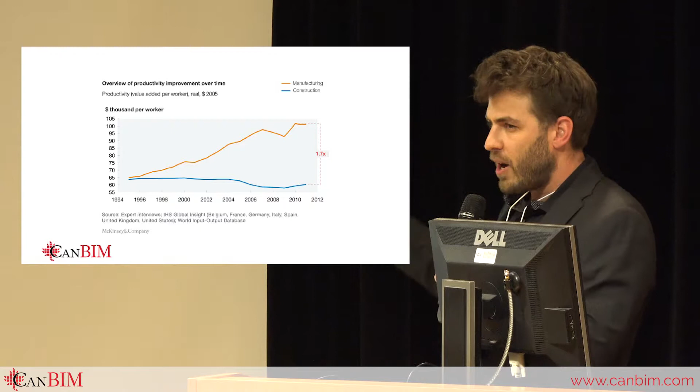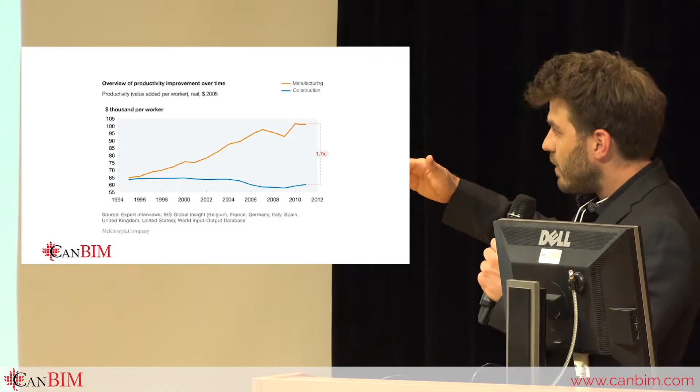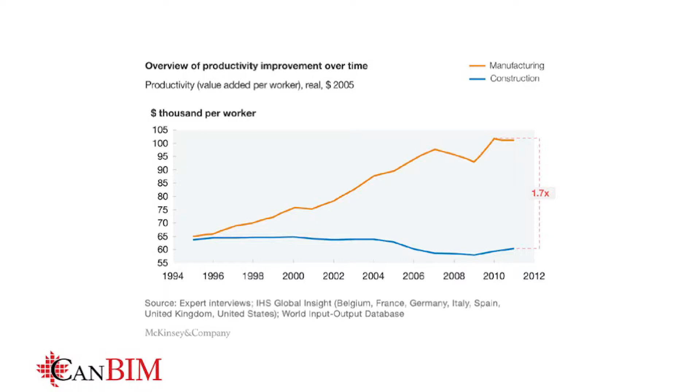So basically, the construction industry is one of the farthest behind of all industry sectors. I like to start off with this graph to illustrate how far behind the construction industry is compared to the manufacturing sector in terms of efficiency in labor and man hours. The blue line illustrates the efficiency of man hours per person in the construction sector, and the orange line represents the manufacturing sector. And we're actually in a downtrend, because as projects get more complicated, the tools we're using are not keeping up with the complexity, and we're losing efficiency on how we execute this work.

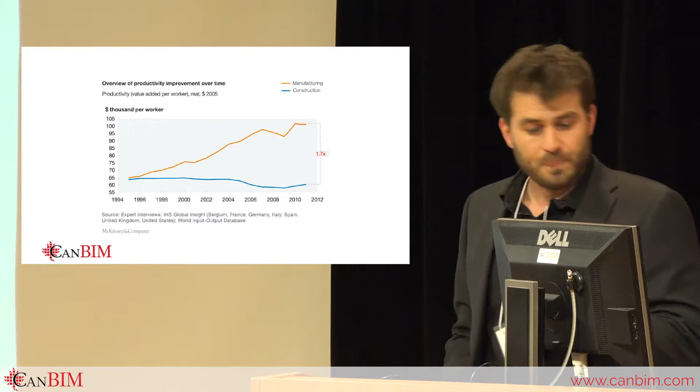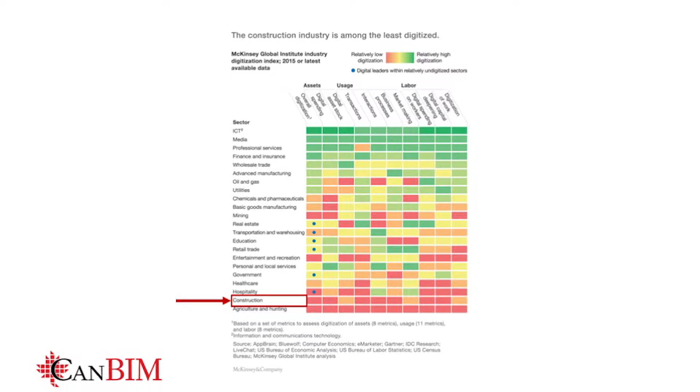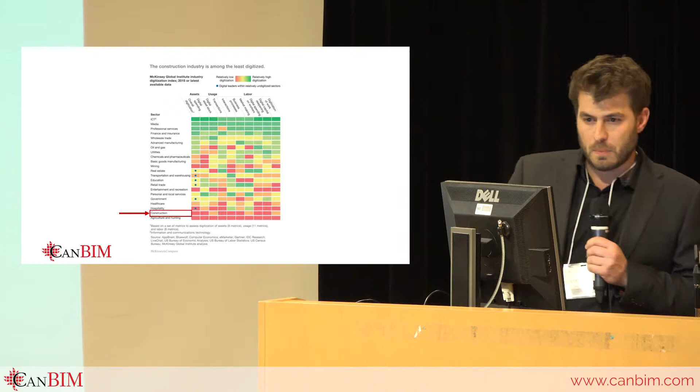Another illustration shows this. It's a little hard to read the terms on the left there, but those are different industry sectors, and this is a survey about the adoption of digital technologies per sector. At the top is the ICT sector, second is media, finance and insurance just below that, and the second last row is the construction industry. So we're just above the agriculture and hunting sector in terms of digitization within the industry. So you can really see that we're falling behind compared to all these other sectors.

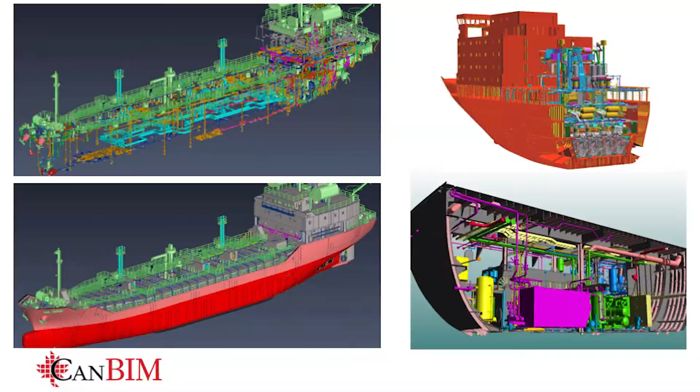I like to use the example of the shipbuilding industry, especially being here in Halifax. I'm sure a lot of people can relate to this. They've adopted these digital tools and 3D workflows because it makes sense for this industry, because they're working with a very finite amount of space, and the risk is a lot higher, and they can increase their efficiencies, start prefabricating their components, and manufacture these ships in a very efficient way.

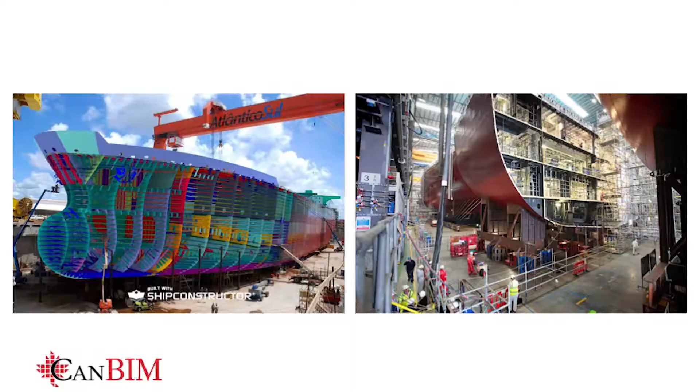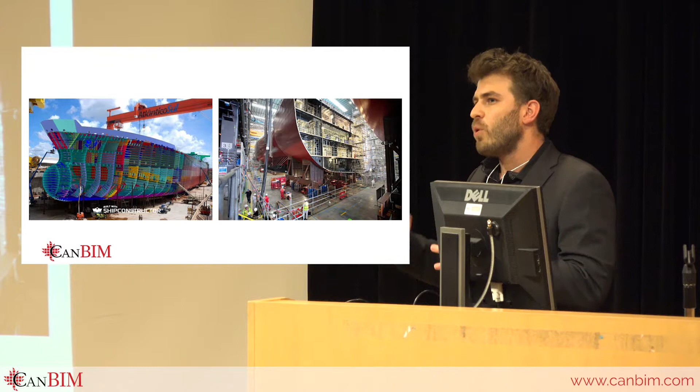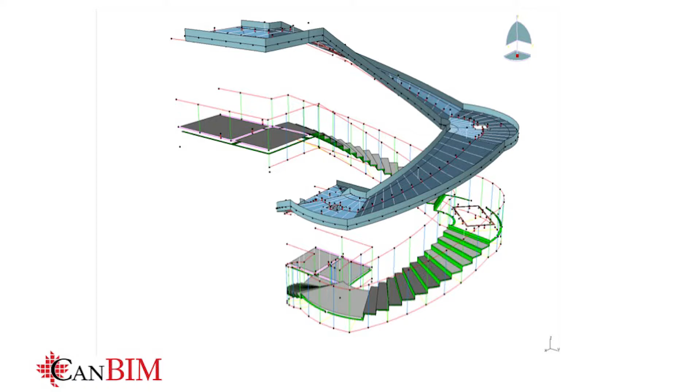So basically, what we're trying to do is take all these examples and workflows from these different sectors and apply them to the construction industry to think more of a manufacturing approach. This is an example of how we're digitizing components of the buildings, where we can break them down into smaller chunks and design them. We can fabricate them in digital tools, and then we can construct these components in the exact same way that you would manufacture them in the shipbuilding sector.

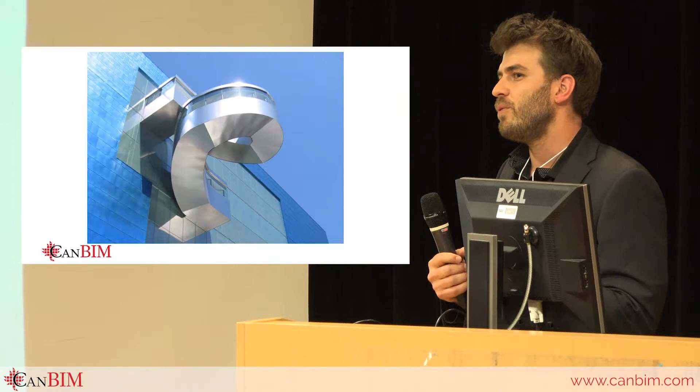A good way to think about BIM is that it's basically an evolution of tools that we've been using in the past. Traditionally, there was hand drafting, AutoCAD came along as a more efficient computer-based version of hand drafting, and now building information modeling is essentially a more advanced version of the CAD-based systems.

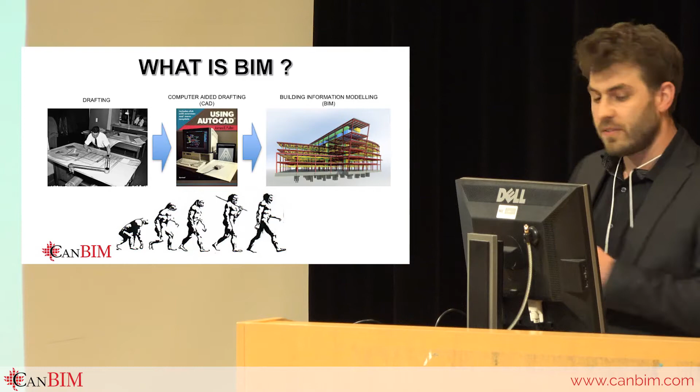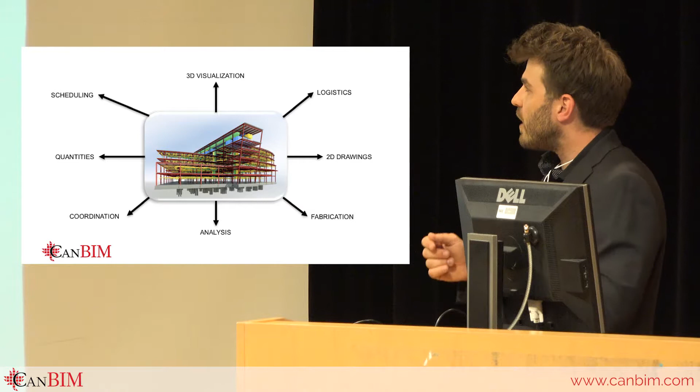And when they started developing these 3D models during the drafting process, we started to realize that there are all these other benefits to having these models. We can use them for fabrication, further detailed analysis, coordination. We can pull quantities from them. We can use them to schedule, for 3D visualizations, and for logistics and planning. So it exploded with all these other use cases for these models.

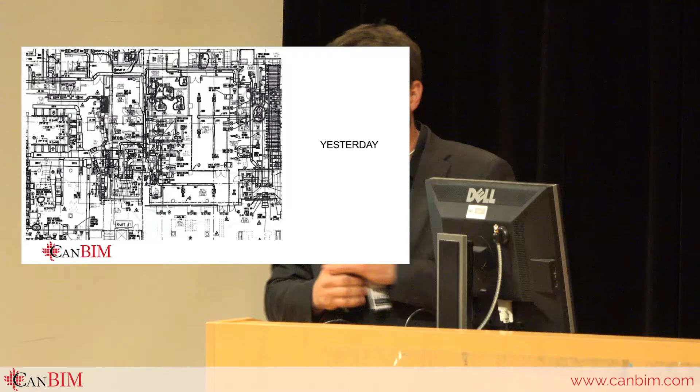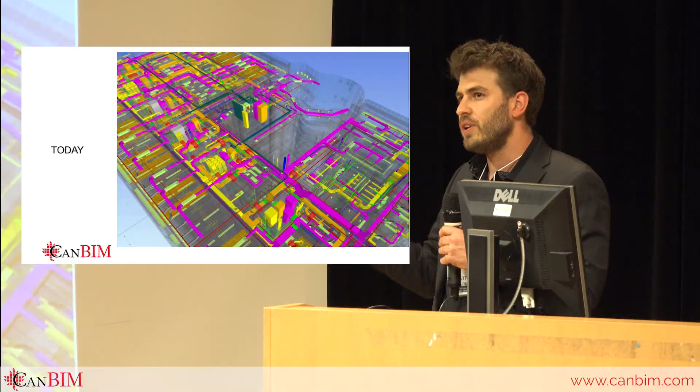This is an image of what a traditional hand-drawn drawing for HVAC systems in a ceiling space looked like yesterday. And this is the type of thing that we're using today. It's the same amount of information, but we're using more advanced tools to display that information and manage it.

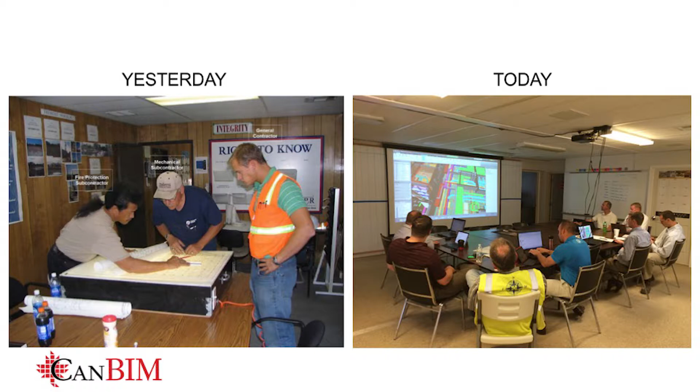Another good image. I like to use this one because I'm sure some people can relate to yesterday's image of using light boxes to do interference checks between multiple subtrades on the job site. Essentially, they would shine the light, overlay the drawings, and you could see if the two systems were interfering with each other. We're doing the exact same thing today in the image on the right, except we're using the 3D models. So we're not reinventing the wheel, we're just adapting to the changing times.

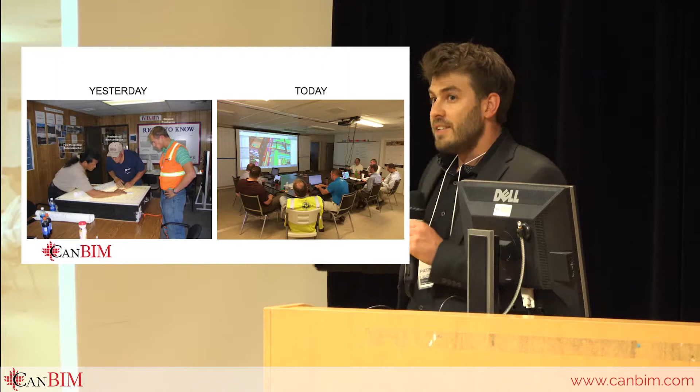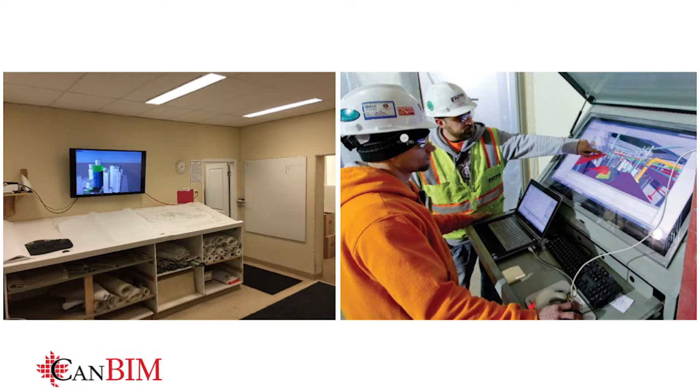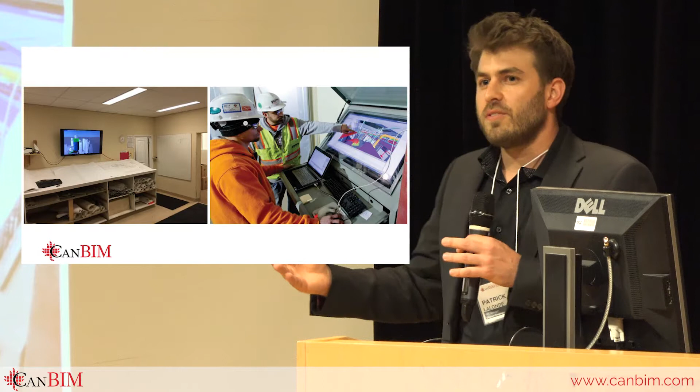Another image shows something that you would see on a typical EllisDon job site. We still maintain the paper-based drawing systems, but we also have access to the 3D model, which we can use in conjunction with the paper and two-dimensional drawings to help us understand the job and communicate things in the field. It's another example of how we've integrated these digital technologies into our job sites and traditional workflows to help us understand the job and build the job.

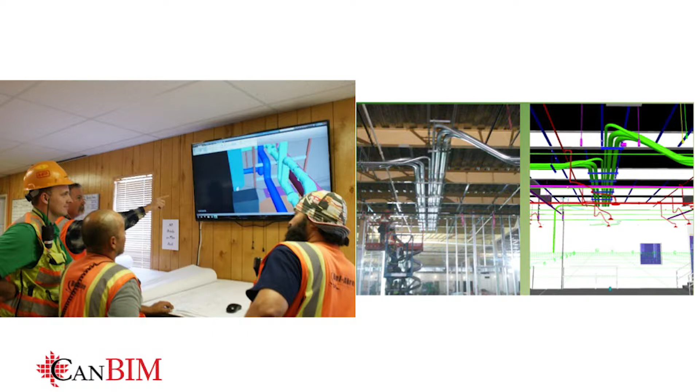Another important thing is that BIM is not a software. It's not Revit. Some people would like to sell it that way, but it's more of a philosophy. It's more of a culture than any particular software or thing. So you can't simply buy it. You have to adopt it. You have to embrace it. You have to learn it.

So this other graphic illustrates all the different social and technical components to what BIM is. Starting in the middle there, the 3D CAD. You have three-dimensional virtual objects. And then you can add intelligence to those objects. And then once you have the information, you have to manage that information. And that makes up the technical core of what BIM is.

And then you have the social parts, which is synchronous collaboration, everybody working on the same page, coordinated work practices, everybody working towards a common goal. And then you have the institutional and cultural framework, similar to what Duncan was talking about, putting the standards and the different processes in place from the top down.

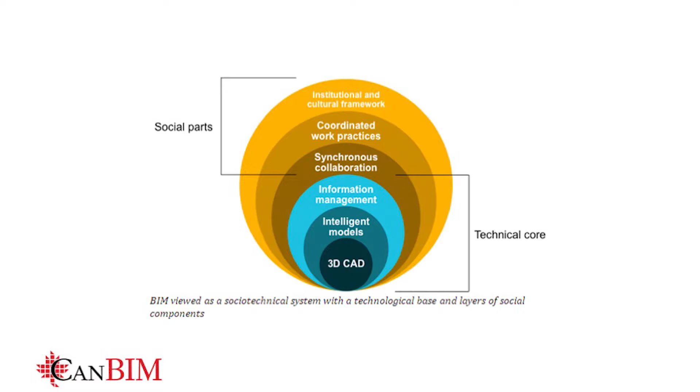So just to jump into some technicals here. If anyone's familiar with BIM, there's ways of identifying levels of detail in a model. So we use a standard with the LOD on a scale from 100 to 500. So during design, the models don't have much detail, and then through design development, they get more detailed.

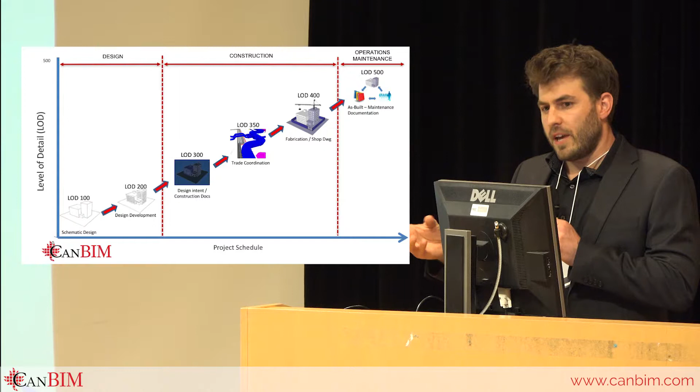Into construction, they become more detailed, and at the fabrication, shop drawing stage, they increase the detail and complexity until final operations and handover, where we can link as-built maintenance information, and they reflect the as-built condition of the model. So primarily in construction, we work between the 300 and 400 levels of detail of models.

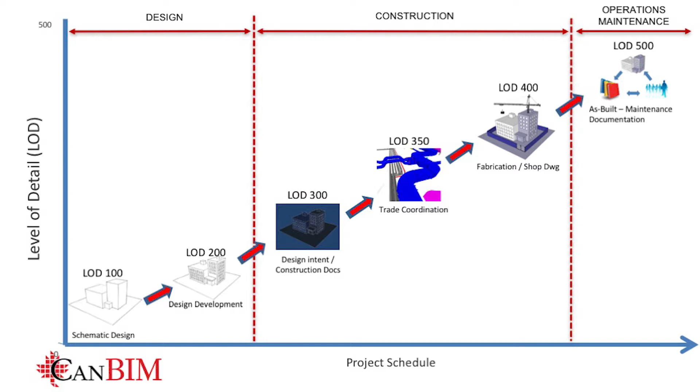So I'm going to use an example from some of the LRT stations on a project that we're working on in Ottawa. It's a $2 billion LRT system with 13 stations. And each station has its own complexity, not so much on the HVAC and electrical side, but more in geometry and finishes. So we've got components of the building that are at an LOD 300.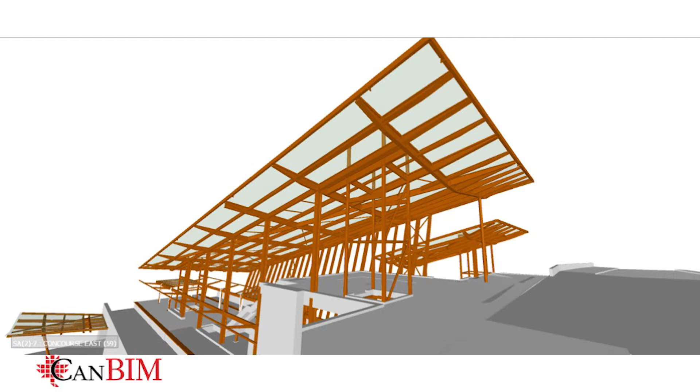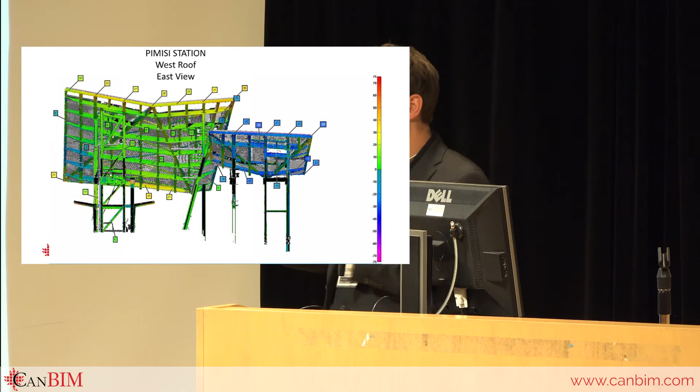And then we can break that down and collect 3D fabrication models of all the structure. And so what we do with that structure is that we take point cloud scans to make sure that all the structure was installed in the correct location. And then once we do that, we produce what we call a deviation report. So if any of the steel is deviating beyond 25 mils, we can identify that from this deviation report because that's going to affect the finishes down the road.

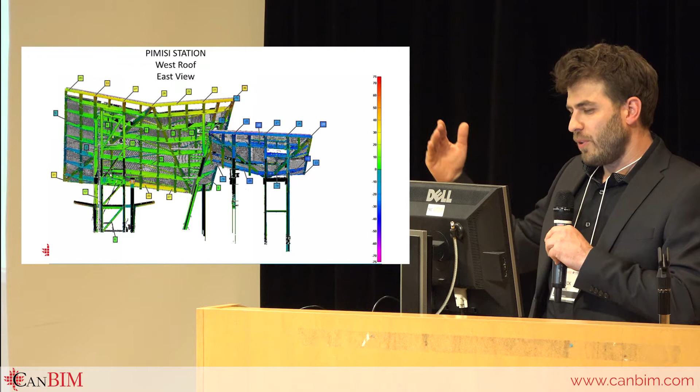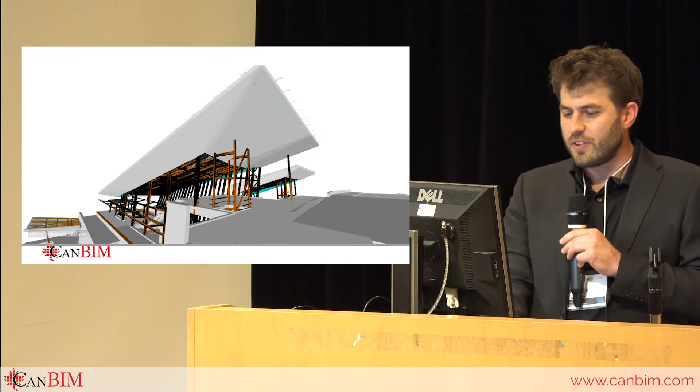So once we've collected the point cloud, we've produced a report of any deviations. We have a 3D model of all of the panel components that attach to the structure. And then we can install each of those pieces piece by piece, and they have very little tolerance. So everything has to line up, or the pieces won't fit.

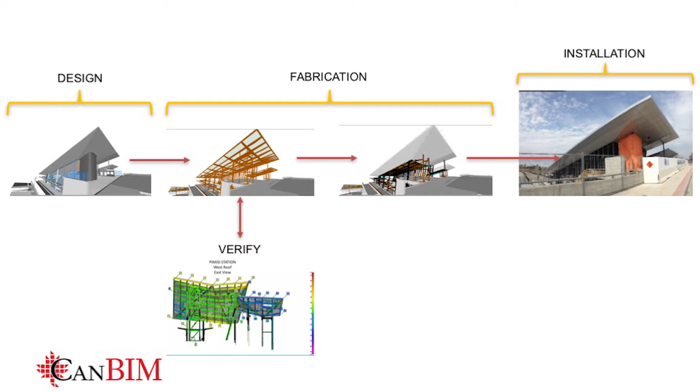So the basic principle is we start with the design concept, and then we produce fabrication models of the station components. We use the point cloud scan to verify any deviations, and then we can proceed to installing these pieces without having any issues of them fitting in the field.

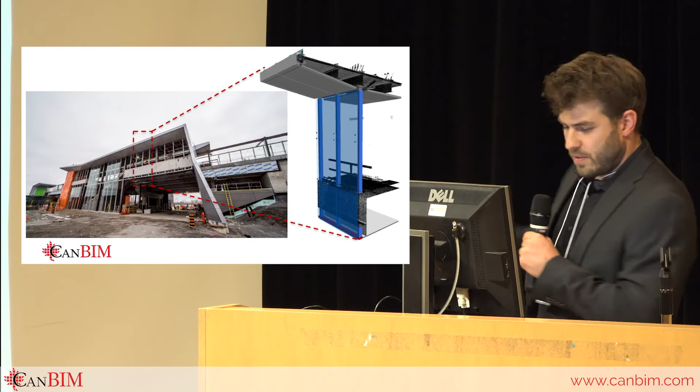So another example where we're integrating the point clouds with the fabrication models to identify any field errors or any deviations. This particular section of the station can be broken down into many different components. And these are all coming from different fabricators, from the design models, from the point clouds.

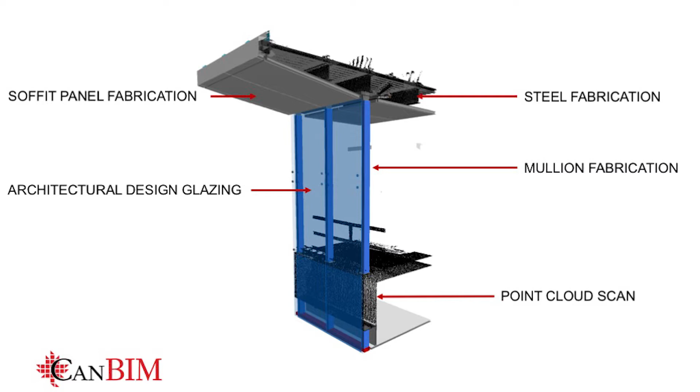So basically we have the soffit panel fabrication model, the architectural glazing from the design model. We have the steel fabrication model, the mullion fabrication model, and as well we have the point cloud scan. So once we bring all these separate components together, we can start to verify if there's any deviations and correct those deviations before these components get delivered.

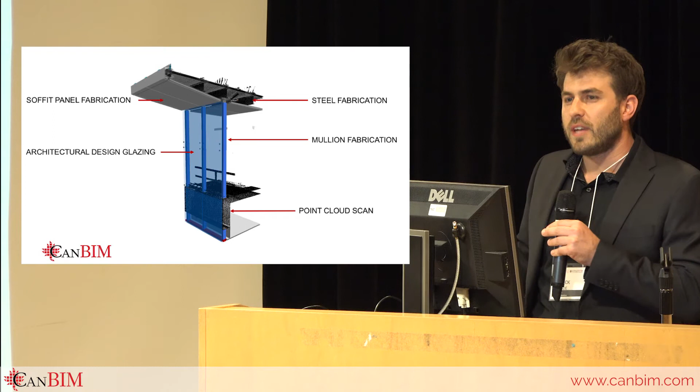So just another example of that, a bit more of a close-up view. We've got the mullions, the glazing, the edge of the concrete can be very clearly defined with the point cloud, and we have about a half an inch gap between the edge of the concrete and the glazing. So we would go through the station and verify that all the concrete was in the correct tolerance, so we can make minor adjustments to the fabrication models, and then they were delivered to site and installed in the correct positions.

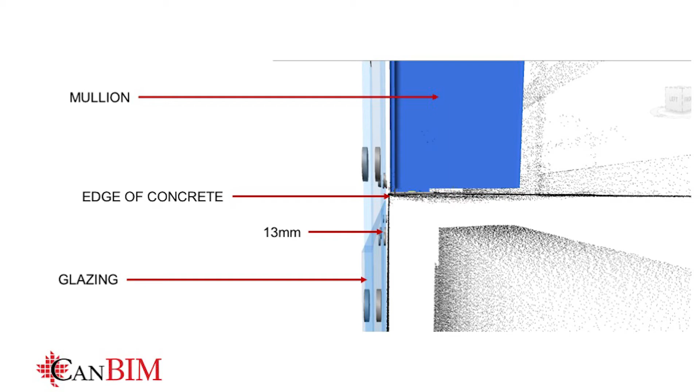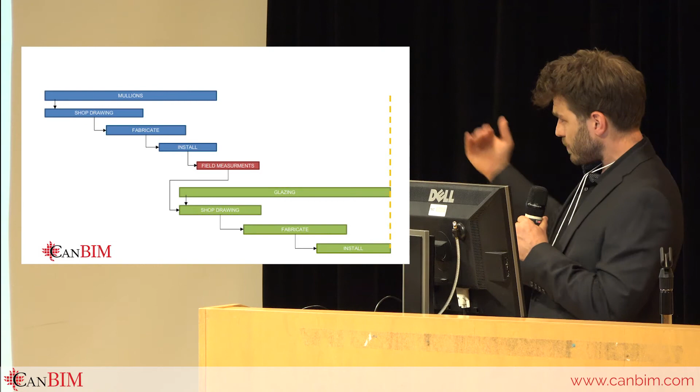So by doing this process, we were able to reduce some schedule time. So basically for the mullions, which are being produced by one contractor, and the glazing produced by another contractor, they have to go through the shop drawing, fabrication, and installation process. And then there's a field measurement step that needs to happen before the glazing shop drawings can be completed, and they can be fabricated and installed.

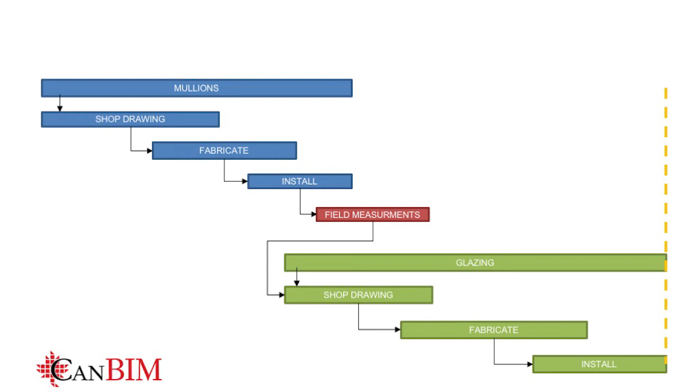So by not taking field measurements and taking all the required measurements from the model, we were able to reduce that activity, so these two things could happen concurrently, and both the fabrication and installation could happen at the same time, and ultimately we reduced that amount of schedule.

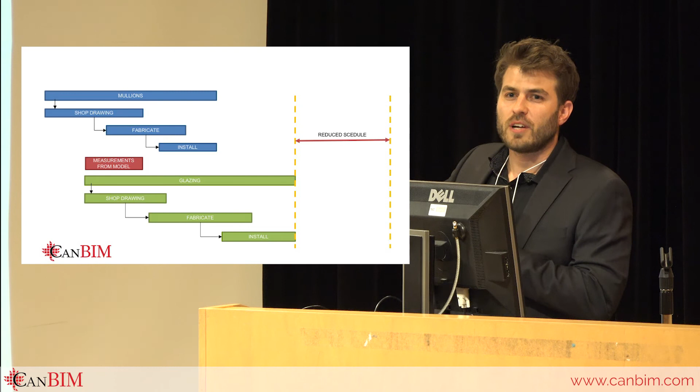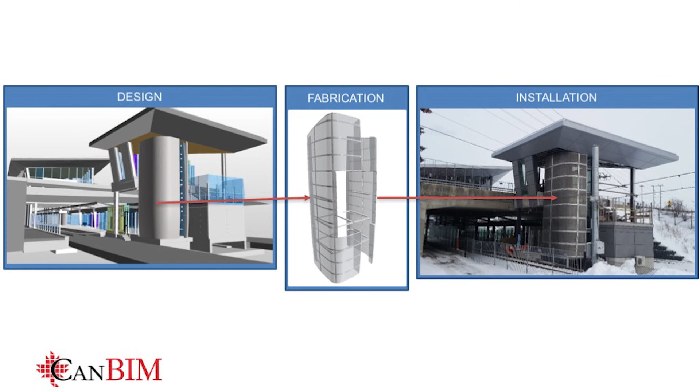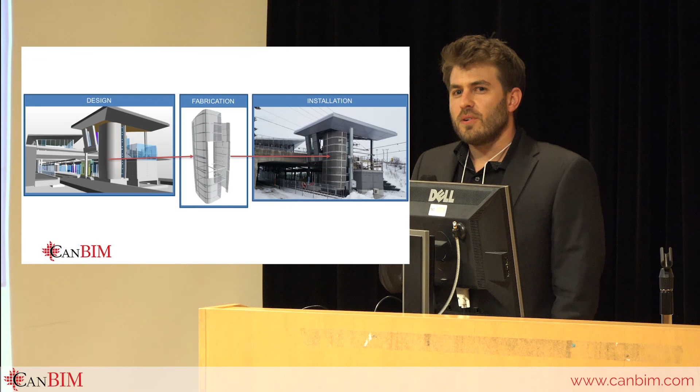So the basic principle is essentially starting with the design concept. We take the concepts and carry that into fabrication, where we have our contractors fabricate the pieces of the building and provide us 3D models of that fabrication. And then when those pieces come to site, we install them exactly the way that they've been detailed in the model. And that's the basic principle of what we're doing and what we're trying to do on all our projects.